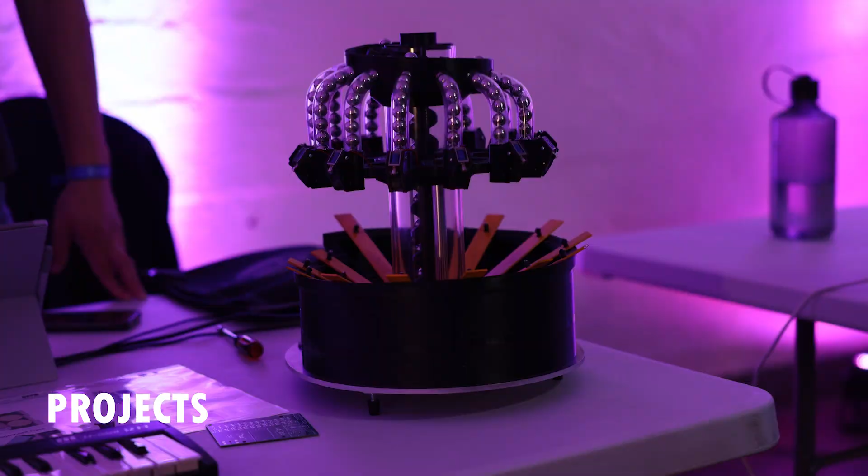Before we start, a few words about me, since I think nobody really knows me. I'm not really active on Discord or anything. My name is Tobias, I'm 30 years old, and I came here from Berlin. I love programming, that's what I do at work, so that's why I chose a challenge that also involves programming. I love doing creative stuff too, primarily with Legos, but also with Arduino and anything else I can get my hands on.

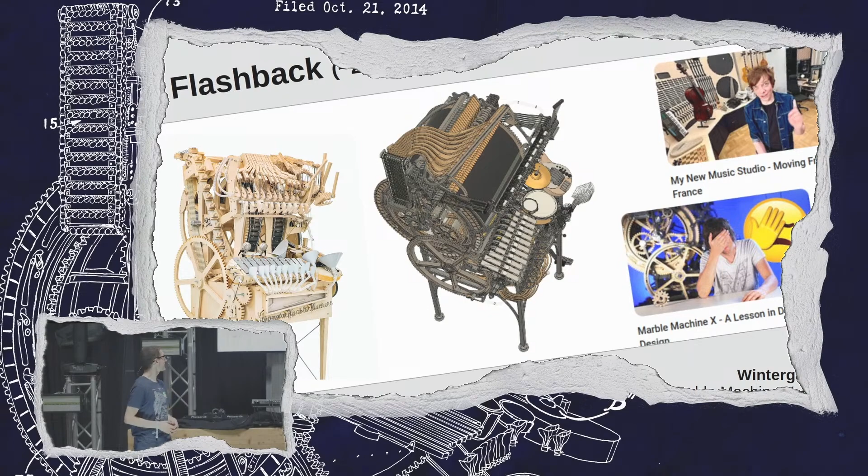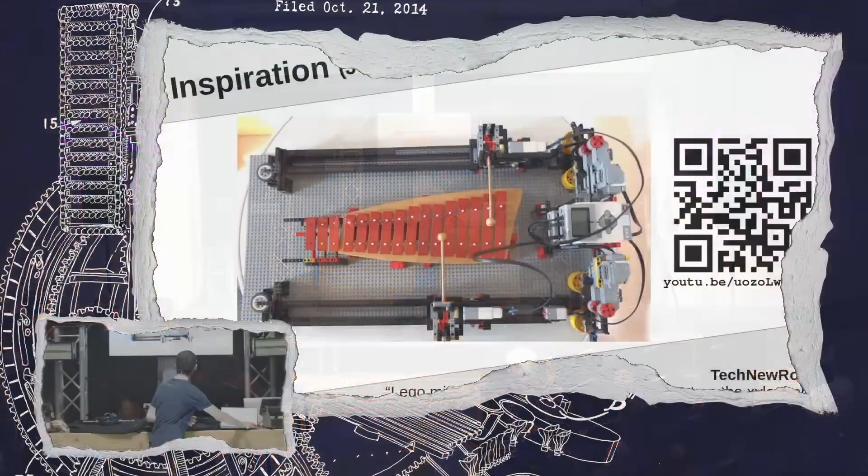I had the inspiration to do something with everything I'd seen on the YouTube channel. I wanted to get creative and make something, because I really love this idea Martin has of making a world tour, this far-fetched goal he's striving toward. I think that's really impressive, and I wanted a smaller version of that, a goal I could reach. That's how I came about this video on YouTube.

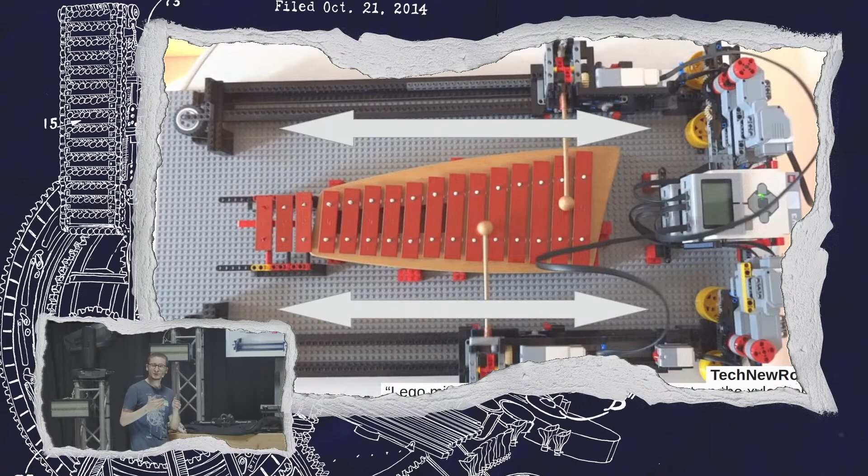That was just a minor thing that bugged me. There's so much energy going into pulling the motors up and down to hit the notes, and I thought, what could you do to improve it? You don't have to put the instrument in the middle. You could put the robot in the middle and build the instrument around it, something like that. I had just a vague idea at that time, and that's when the whole process in my head started: what could you do, how could you implement it, how could you build it, would it even work? I didn't know.

That was all theory in my head. I didn't really know what I was doing. But then I found this on Otto. I just browsed around, thought it was an offer, and thought, oh no, I have to try it. That's when the whole journey started. I didn't even know if I could pull it off. I just went straight in and bought it. I have no background in CAD or anything, so I don't have CAD software. We've seen Martin designing stuff first in CAD.

I started with physical designs, as I had no other means to do so. I laid it out in front of me and thought about what I could physically do, how to arrange the notes, how to pull this off without motors moving around, so that all the motors and stuff stay fixed and only the mallets move. I tried a few layouts, but the big question was that you don't have a lot of space in the middle. So I thought about what could possibly fit inside that space to hit all the notes one after another in a song. I had a few ideas, and I took a lot of inspiration from music.

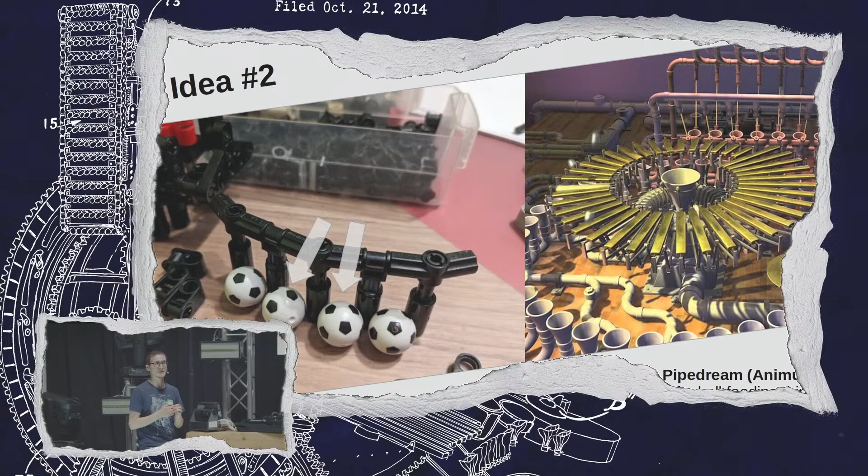Another idea I had, of course, was a marble machine, like the Animusic version did. I also thought about using marbles, but I tried it and it's really hard to handle them. They want to go everywhere, and Martin knows. So I also scrapped this idea, though it was hard to let go of.

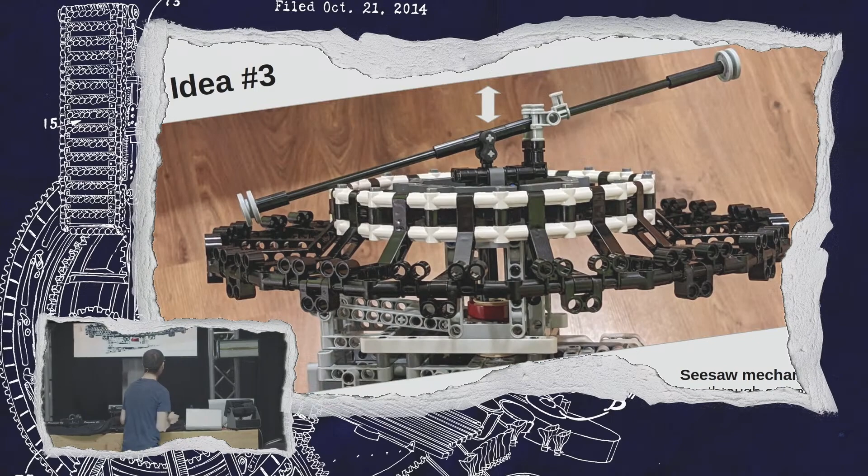Then the final idea I had was some kind of seesaw mechanism, maybe you know it from a playground. I would have one long mallet that I could turn in either direction to hit the note I wanted, with the whole mallet turning to face the right note to play. That was my first idea with this kind of mechanism.

The idea there is that the seesaw's holder isn't in the middle but slightly offset, and in the middle there's a mechanism that goes up and down to handle the motion to hit the notes. That was the first idea that I thought was really workable, doable, and that's what I went with.

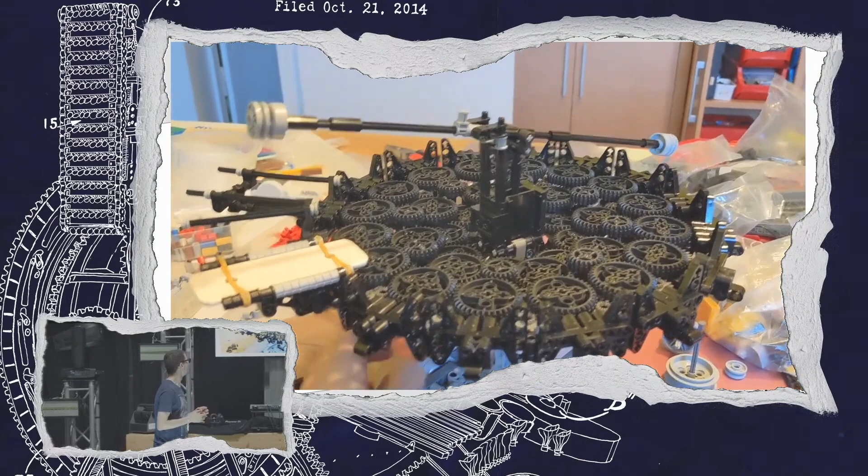Here's the first version of me testing this, and it's all manual what I do there. There's no sound to hear because it doesn't actually play the note really, but the prototype kind of worked.

But I already noticed it would be really hard to time the hitting, because the note will only really play if you hit it shortly and then let go. If you stay there too long it will just do nothing, it won't vibrate or make a noise or a tone. So that's where I thought, no, this could be the wrong approach maybe.

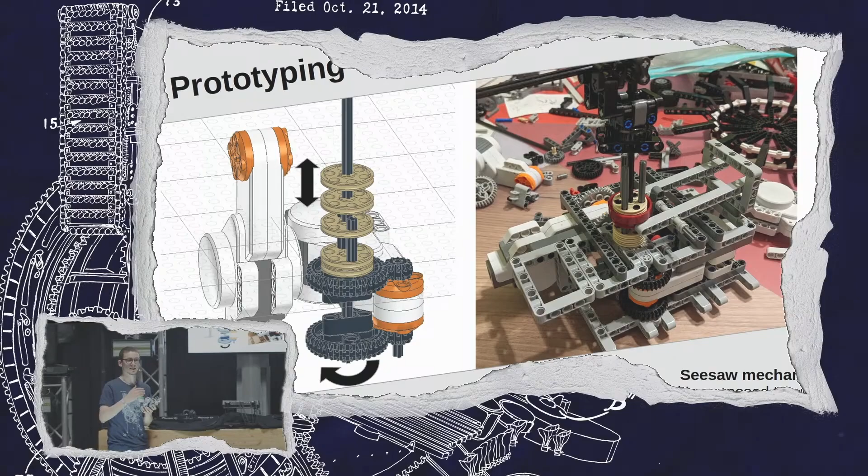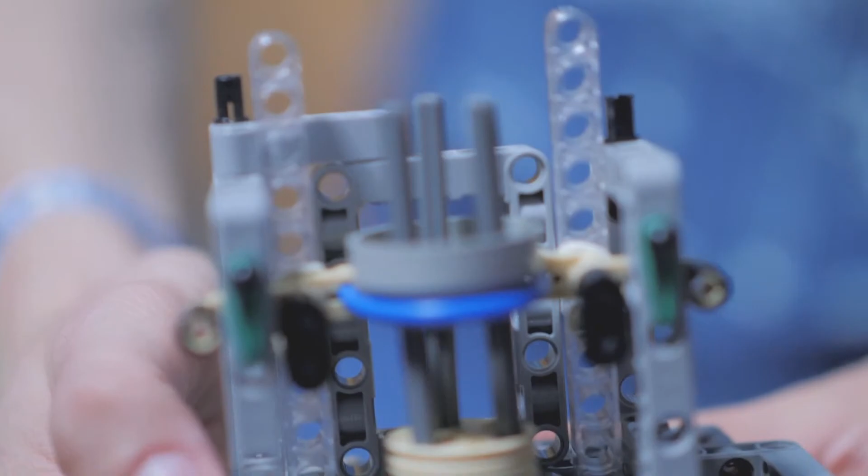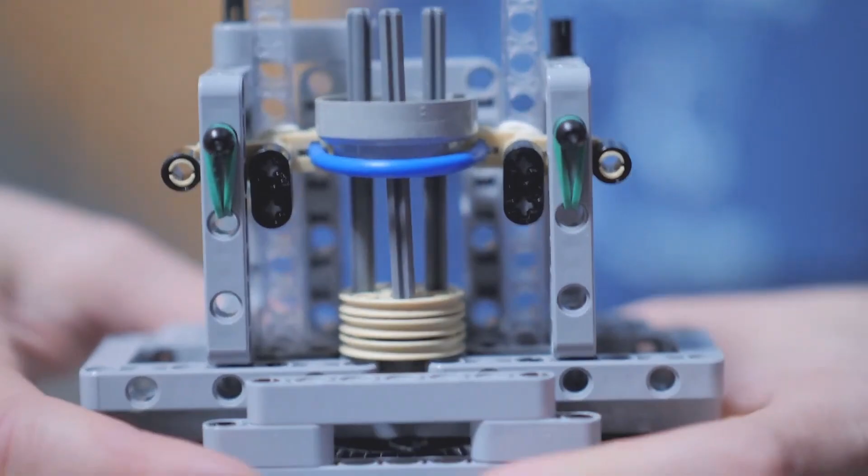The prototype I made for doing these two motions through one axle is exactly what I made here. I have one motor doing the rotation part, turning the whole thing, and up over it there's a head that can move up and down, with a motor attached to it doing that movement. That was the idea to implement this motion.

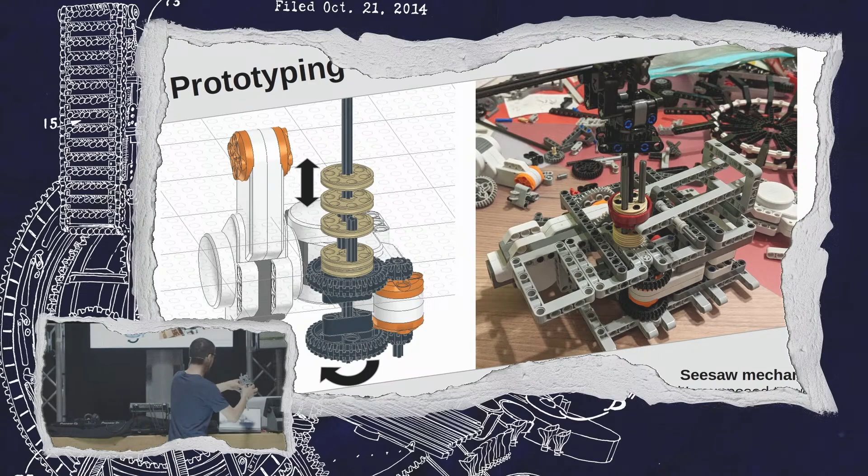But the problem with it is that it always snaps to one position, like with the rubber bands, it wants to go to one position always. The issue I noticed was that I want the main position to be horizontal, but I also want the force to hit the note, so I have to pull it out of this position on both ends somehow when I want to play a note.

So I couldn't wrap my hand around it, I couldn't get it working. It would either hit to the middle and not work in the end, or it wouldn't stay straight. So I couldn't really change notes without playing all the notes, and it wasn't really working.

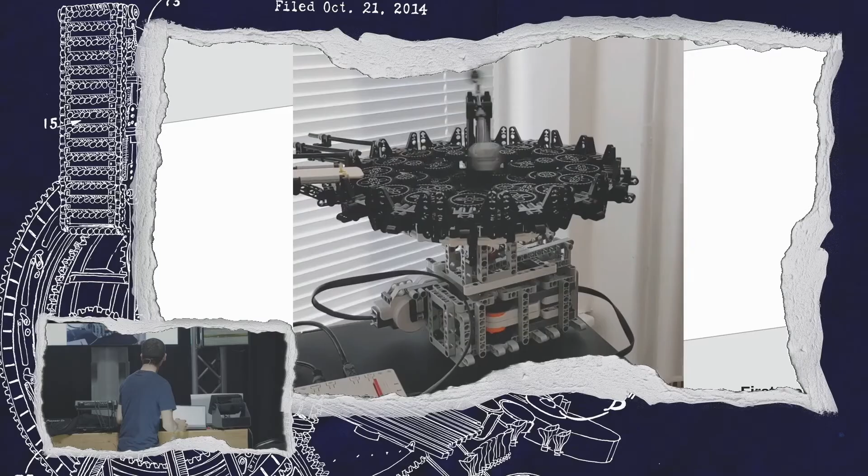Instead of changing the approach, I first tried to program it, but it's funny how it was just driving around for no reason. Still, I stayed with this approach and tried to make it work for about 4 months, iterating on it to somehow make it work. Turns out, no, I couldn't make it work. But yeah, that's life, I guess.

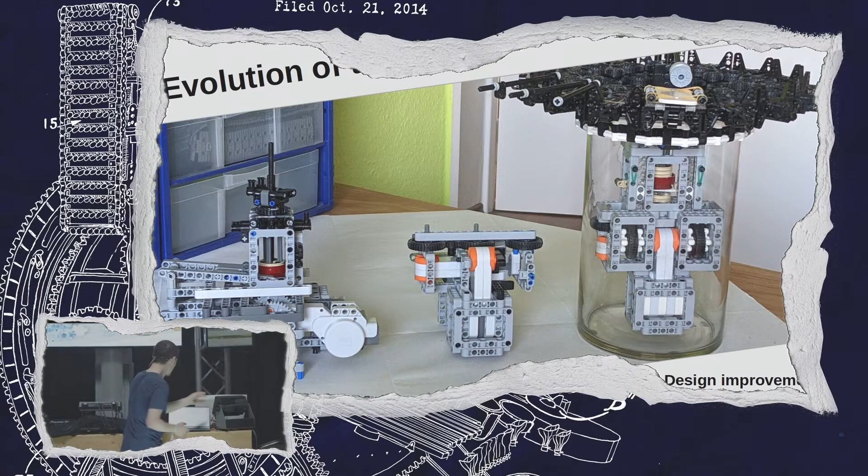So here's the prototype I've shown you. After this, I had the same feeling Martin had with the video he showed, but I felt double dumb because I had seen that video and seen the mistakes he made, and I felt like I'd done exactly the same thing, improving the design without first thinking about how it should work. That really hit hard.

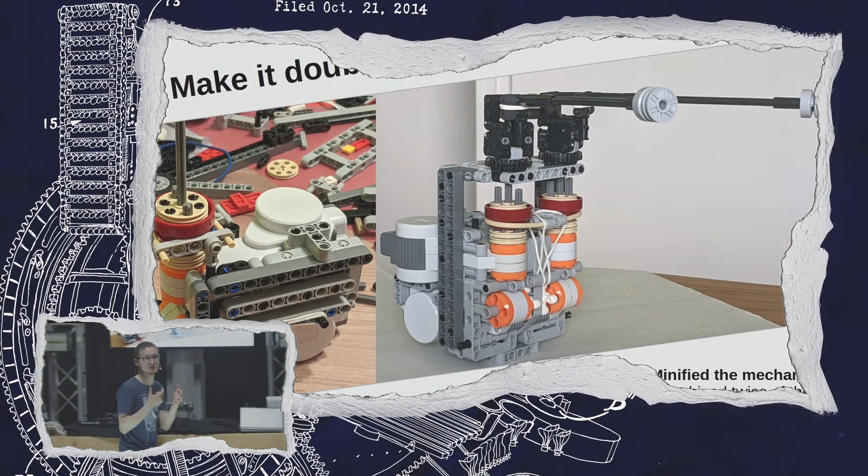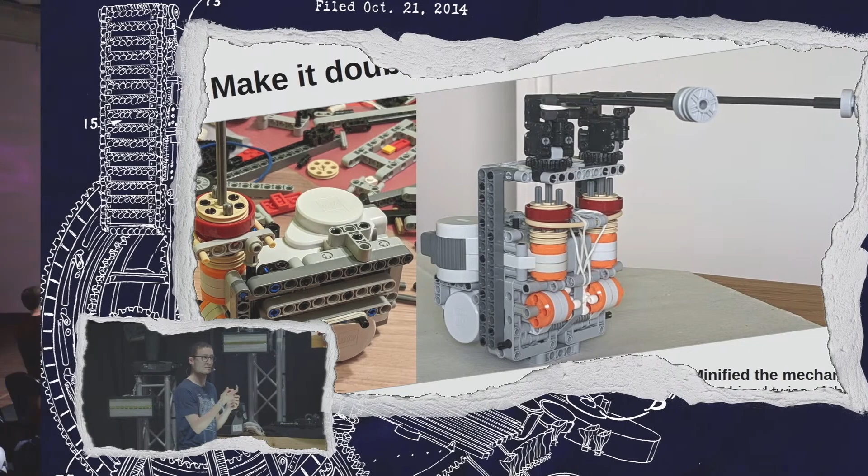After that, I rethought how to pull this off, and came up with this mechanism. Basically, it's working really well, it snaps to a position and can turn quite smoothly. I should use that mechanism, but the upper half of the robot should be completely different. That's when I tried to make it work with 2 mallets.

I thought one mallet wouldn't be enough, because when I have to hit a note on one side of the robot, it wouldn't be fast enough to go to the other side in an eighth of a note or something, that would be way too slow. So I needed two mallets somehow, and that's when I tried to cram two of these mechanisms into one block.

Another goal I already had in mind was I wanted to have it in the glass that is standing out there. I had the glass first, so that's how you do stuff, of course. That's how this thing developed. I tried to cram it more and more until it fitted into the glass, and finally this came out of it.

So I had the mechanics all figured out, but now the programming started, and it was honestly a mess, because the Lego Mindstorms robots I'm using are not supported anymore by Lego. So you have no real software support for them. You have the IDE that Lego developed, but that's all just GUIs, a very visual approach for children, like you put blocks onto the screen and program them this way. That would be total chaos for a little bigger project, you would just scroll everywhere and wouldn't see the whole thing.

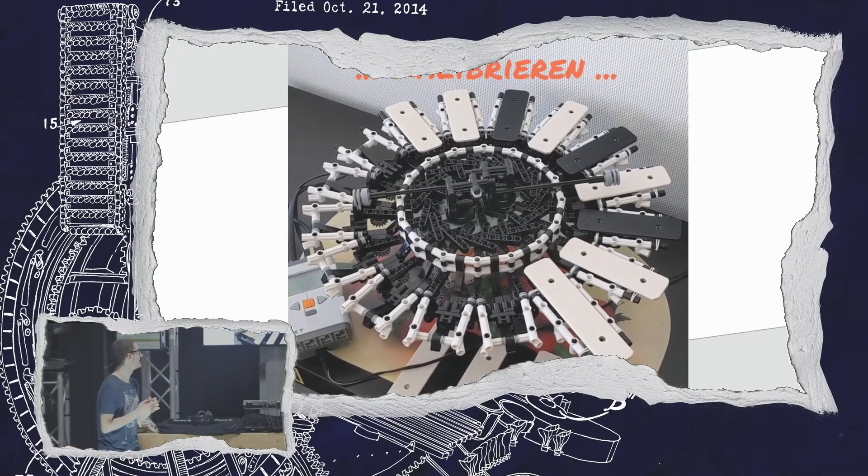So I had to boot a virtual machine to get it working, but it works. It works so good, in fact, that I could finally get it to work. You see it here doing its calibration thing, where they go against each other to know where the zero point is, and then I could finally hit each note perfectly. And yeah, it worked. That was the breakthrough for me, this approach finally worked.

I tried some others before that I don't want to dive deeper into. I also tried Arduino and stuff, but it didn't work. And so now was the time to finally get a song working.

Thing is, with two mallets, they are blocking each other. So I can't just take any MIDI file from the internet, put it on this thing, and have it work. It would just collide with itself. So I had to come up with a way to make some route planning or routing improvements, and that's why I made this kind of helper clock to remember which note is where currently.

I used the MuseScore software to get the MIDI files, rearrange them to fit in the 16 notes that it can play, and get the notes, because I'm not really fluent at reading these. By the way, I also have no musical background or anything, that's just somehow getting it to work. And then the programming side is also a bit of a mess to get working. I kind of invented my own music notation in C to get it working.

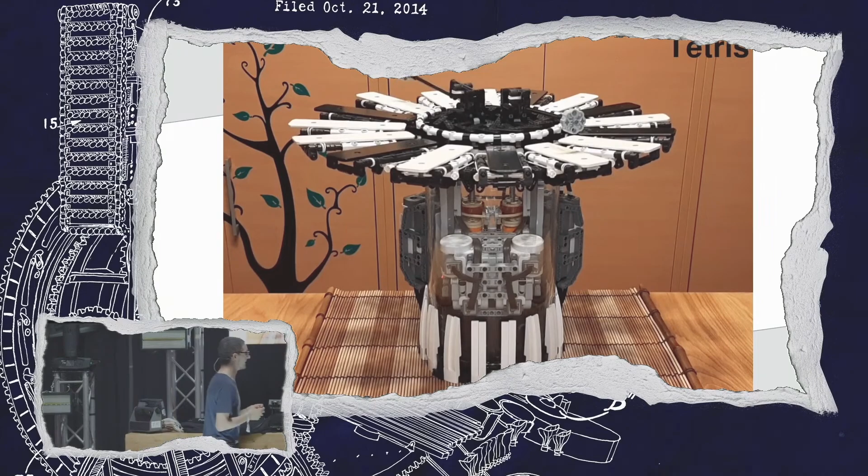And that's how it got to finally play a melody. As you can also listen in the room over there, or when you're at home, you can go to my website, it will be at the end of the presentation. There is a video of it playing every song that I've programmed it to play.

And now, the thing we have to go from here. At first it will be like it is right now, on other exhibitions. It's on our own exhibition from our club in Berlin, the Berliner Steinewahn. If you're in Berlin, feel free to come. It will also be in Dresden at the Spielraummesse, doing its thing there just like it does here.

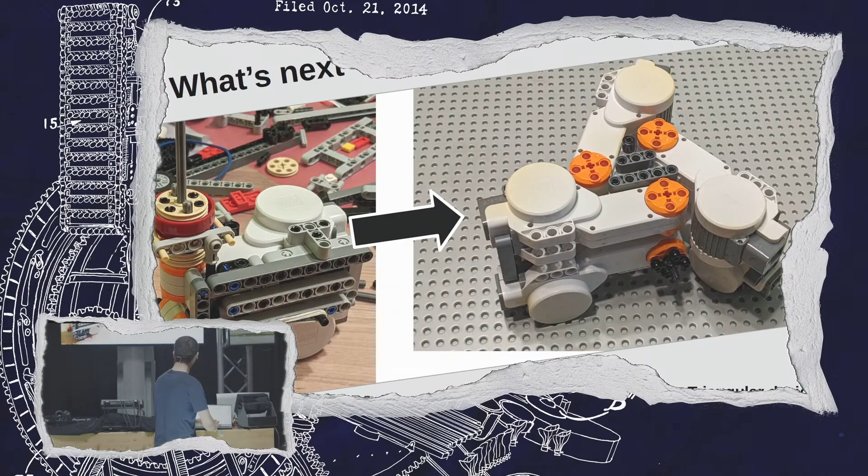Maybe with a few more songs, we'll see, but I have some other ideas for it. I don't really know yet which route I'm going, but one idea is to add another mallet onto it, because there are some songs it's just not capable of playing, since they switch too fast between notes. So it would be good to split up the work and get another mallet helping.

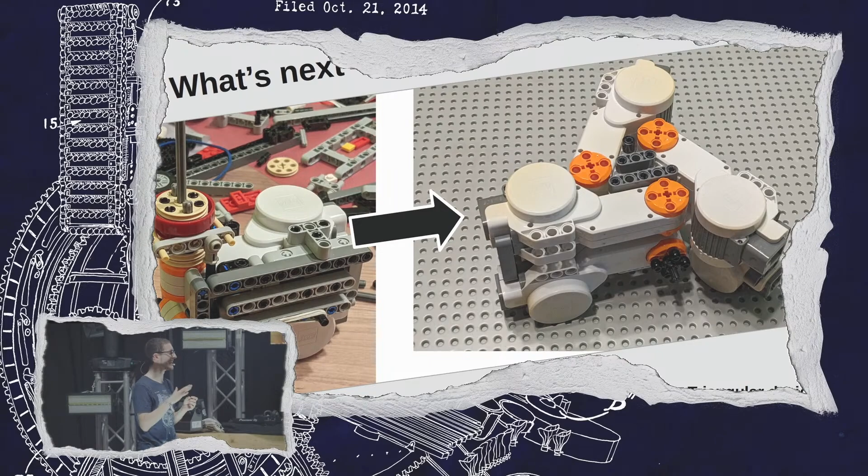And so yeah, I have this motor design. By the way, the Lego motors are also really awkwardly formed, so you have to really plan how to place them in the space you have. So I came up with this design, and maybe this will be the base for the next robot, but I don't know yet.

The other thing, I have more Technic stuff from Lego lying around at home. There are these Lego Spybotics, they were called. Lego had them for 1 or 2 years, and then they saw that they flopped on the market. So you get them really cheap on eBay and stuff, and yeah, I have a lot of them at home and would like to do something with it.

They sound a bit like a Game Boy, so a little bit of 8-bit music would be nice maybe to accompany the Glockenspiel. But of course, the elephant in the room is the programming of this thing.

The NXT has a Bluetooth interface, that might be a way to get the data in there. Or I have to pretend there is some sensor so that I can put it in via wire into the robot. But yet I don't know how to pull that off. That's the big challenge.